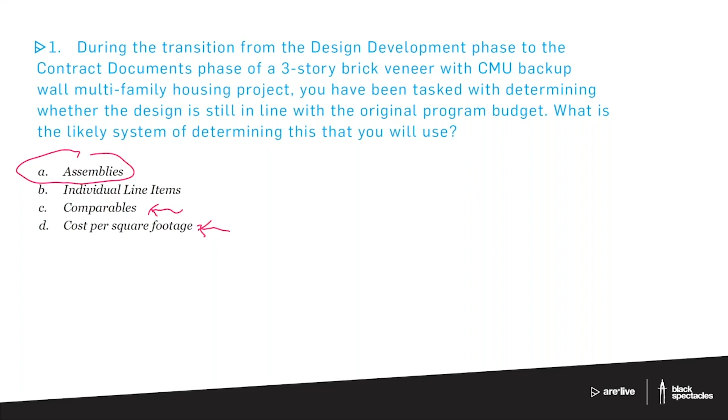I always say this—remember, this is just me writing these out in order to have some things I want to talk to you about, so they're not necessarily foolproof. If I fooled you on something, don't fret about it. It's not meant to be like that—it's great if you get it, but use it as an opportunity for thinking. Don't be mad at Mike. Please don't be mad at me. You can be mad at Mark if you want, but don't be mad at me. Fair enough. All right, number two.

After years of flooding and all the calls from irate taxpayers and voters, your local town has instituted a very robust set of regulations about stormwater issues. Which of the following are probably part of the regulatory structure? Choose three.

This is something actually happening essentially all across the country—there's so much built-up hard surface, roofs, parking lots, roads, that we're collecting this huge amount of water and nobody really knows quite what to do with it. As we get storm surges, we get backups that supercharge our stormwater systems, which in most of the country are combined with the sewage system, for obvious reasons—it's cheaper to do one system than two completely separate systems.

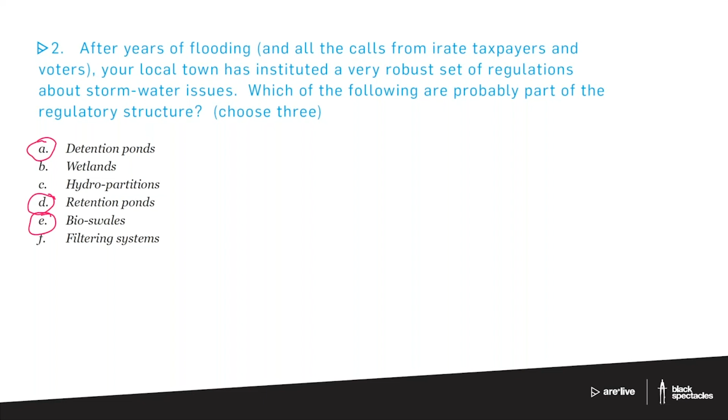All right, I think we're down to about 100 folks actually, so a lot of people got that one right. Cool. All right, number 3.

A 3-story office building you are designing has 9-foot ceiling heights throughout. In trying to formalize the building sections and the egress stair layout, you review with the structural engineer and the MEP engineer and receive the following information.

Structural wide flange beams and girders are 21 inches max. The corrugated steel deck with concrete fill is going to be about 5 inches max. The largest duct is likely to be 40 by 24. And the clear area above the drop ceiling for the light fixtures and sprinkler layout is expected to be about 10 inches.

And the question becomes: how many risers are there between the second and third floor? This is a pretty simple question. It just has a lot of information in it, but it's actually a very simple idea. All you're really trying to figure out is what is the floor to floor.

We know what the floor to ceiling is, but if we're trying to understand the stair pattern, how many risers, how many treads, how big the stair needs to be, we need to know not just the floor to ceiling, but the floor to floor. So by just adding it up, we can get a pretty good idea.

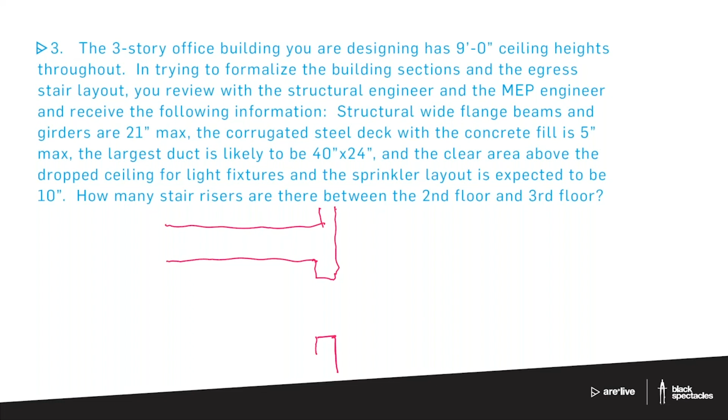So if you can imagine, you've got a floor system, I've got a wall here, there I am standing in the space. I've got decking there. I've got the wide flanges, the structural system underneath that. I've got space for the ductwork.

And then I've got this other space, which if you're not used to it, may sound a little weird, but it's that last little 10 inches that they've left for the light fixtures and the sprinkler layout.

Now, the reason we do that is because this is an office building, an office space. You don't have to do that, you don't even have to have a drop ceiling, there's lots of different ways this can get done. But office space is typically understood to be quite different from residential space.

You might change things in residential, like if somebody moves out of a condo and somebody else moves in, they might change the colors, take a wall out, do this or that, but effectively it's going to be the same basic layout. At least that's the expectation.

Whereas an office space in an office building, people are going to change that pretty regularly. Every 5 years, it's probably likely to have a new layout, as one business moves out, another one moves in, or the business holding it has some change in the way they're organizing things, and instead of lots of small offices, now they're doing one big open office with office corrals in it or something like that.

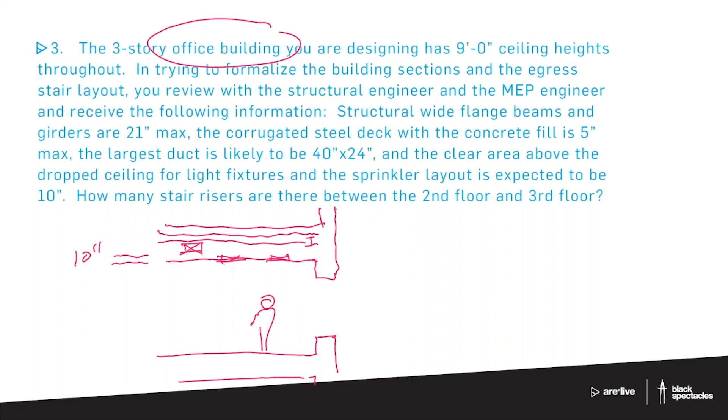The other ones are all pretty straightforward, just adding up numbers. The one little catch is the 40 by 24, because you have two numbers there. There's no reason to assume you'd have to go the tall way unless it said so, so there's no reason ever to do that. You'd always go with the shorter number in this case. So that ends up being 9 feet, which is 108.

And then we've got 21, 5, 24, and 10. I believe that adds up to 168. Somebody want to check me on that? Let's see here. All right, and then we're going to divide 168 by 7.

So why are we dividing 168 by 7? Well, that's because our assumption is that this is a public space, not inside your house or apartment. That means the stair has to have a maximum riser height of 7 inches. So that's where we would always start. We're going to divide that and get 24. So 24 is the correct answer for how many stair risers there will be.

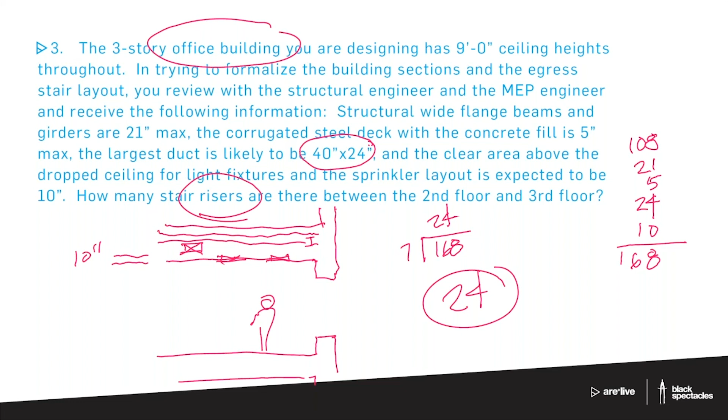Number 4: to finalize the schematic design for a single-story small gymnasium for the junior high school your firm is designing, you make a reasonably accurate best guess for the structural system for the 68-foot clear span. Choose one: Vierendeel truss, wide flanges, concrete slab, or open web steel joists.

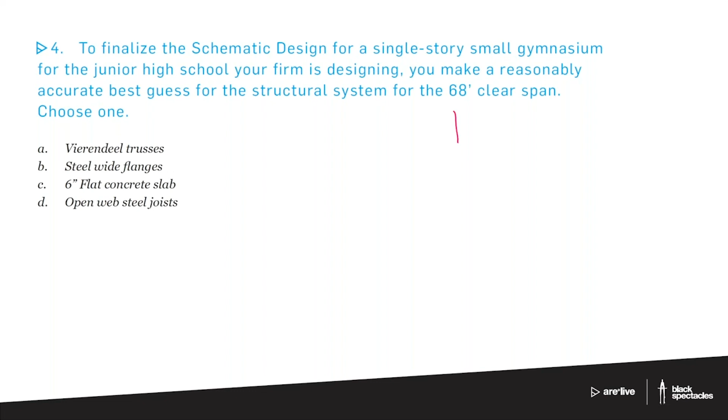So, Vierendeel truss is just so likely to show up on the exam. It's a kind of old school architectural thing, and it's weird because it's a very specific truss that actually isn't a truss. If you think of what a typical truss looks like, with all the diagonals, it's probably not great - let's add one more there. That's a kind of classic truss.

A Vierendeel truss looks like this - which is to say, it's not a truss at all. Without the diagonals, it doesn't actually function as a truss. But architects, especially those from the 60s and 70s, love the Vierendeel truss. It has this very cool, memorable name, and so it shows up all the time on the exam. Often you'll see these used as bridges, where the scale is so big you can kind of walk through it. Architecturally, architects always love them because without the diagonals, the steel doesn't get in the way of the windows, so it fits into a typical architectural scene. But it's a very well recognized name, not always appropriate.

It's very expensive - all of these have to be moment connections for this to work. It's a much more expensive system than you'd use on something like this, unless there was some really big defining reason why you needed it, and it doesn't say. So we're definitely not doing Vierendeel truss, but you should know that term because it's likely to show up at some point.

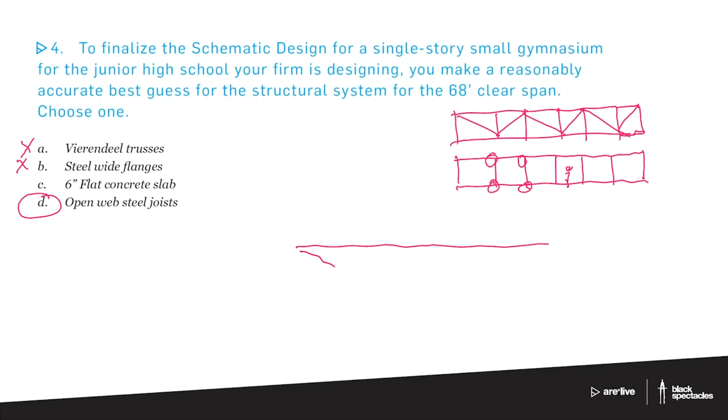You can go shorter as well. The big advantage of open web steel joists is that these are the ones that look kind of like that. The other big advantage, other than being relatively light and comparatively inexpensive for the amount of steel you've got, is that they're open.

So I can put ductwork through them. They don't weigh a lot, so they're not adding heavy load to the building for foundation purposes and everything else. So there's a bunch of advantages. The big disadvantage, like I said, is that they do have a little bit of bounce. So to get the stiffness, they have to be pretty deep, but you're not using a lot of steel. That back and forth makes them a logical choice for a project like this.

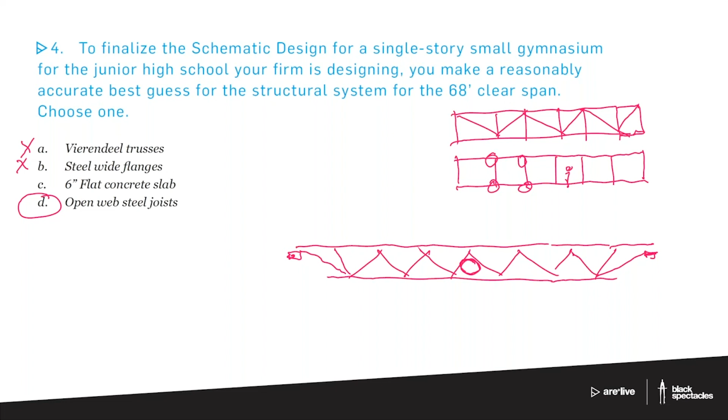All right, I think we're down to 42 people, Mike. All right.

Number 5, the standpipe is located where? Probably: we have fire-rated egress stair aligned with the main vent stack, part of the plumbing waste system, with the scaffolding during concrete formwork stage.

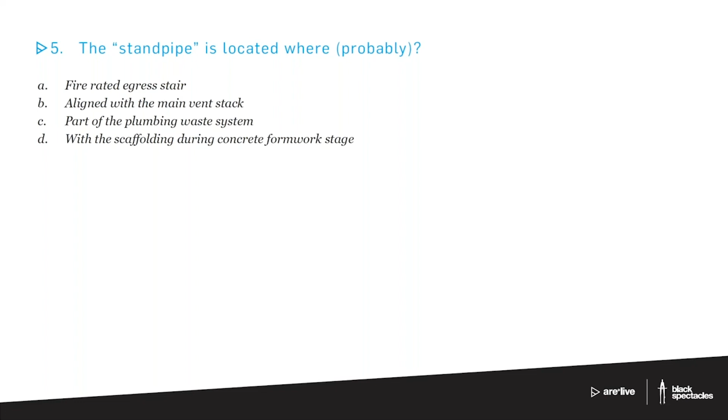So this is one where you just have to recognize the term standpipe. I'm just going to give you the answer: the answer is at the fire-rated stair.

The easiest way to think of it is picture yourself as a firefighter. You run into the building, look at the annunciator panel, and it says the fire is on the 5th floor. You take your hose, connect it to the fire hydrant out on the street, and your hose is now filled with water. You're running up the stairs with the hose filled with water, while people are trying to get out of the building, and you're getting water all over the place and people are slipping. It's a recipe for disaster.

So a way around that is by using a standpipe, essentially a pipe that shows up on the sidewalk and goes straight from the sidewalk into the building, typically right up vertically at the fire-rated egress stair. So that firefighter, instead of taking a full hose up the stairs, goes in, figures out the fire's on the 5th floor, and runs up the stairs or takes the elevator with their hose. Somebody connects the standpipe out at the street to the fire hydrant. The standpipe fills with water as it goes, charging up all the way up the building. By the time the firefighter is on the 5th floor, they can connect to that standpipe with their hose and start putting out the fire.

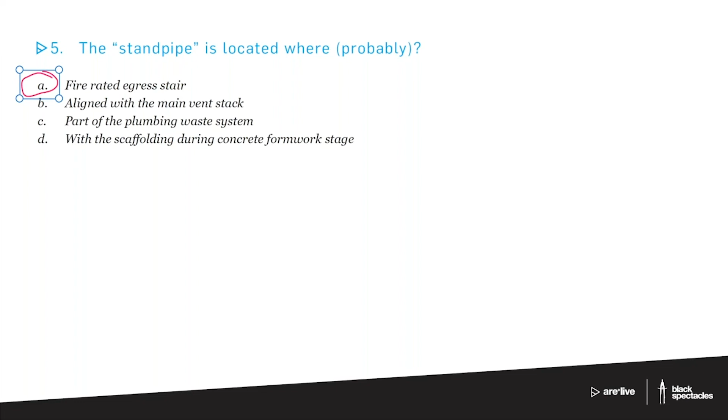Okay, I think we're down to 39. Alright, so I've got a lot of people holding on here. I think we're going to be okay, sending out a lot of T-shirts.

Number 6: during the initial project analysis, it was decided that the Denver University building should focus on long-term sustainability. Which of the following seems likely? We have DX rooftop units, R13 wall assemblies, geothermal ground source heat pumps, and LED uplighting on the front facade of the building.

Let's start with the LED. Obviously, if I'm choosing a lighting system, LEDs are a reasonable choice, so that's potentially a positive. Uplighting on buildings, though, when you're talking about sustainability, is not really a current way of thinking about it. The problem with uplighting is that you're putting a lot of light up into the sky, called night sky lighting, and wasting a lot of the energy that went into making that light. The other thing it does is confuse the birds. So there's all sorts of problems with uplighting on buildings.

So let's go to R13 wall assemblies. R13 is just not a lot of insulating power. A place like Denver, you're going to want serious insulation in those walls. R13 would be a pretty typical old-school amount; back when I was first starting out, we did R13 walls all the time. These days, in a place like Chicago or Denver that gets pretty cold and also pretty hot, it would be very unusual to do anything less than R19. I just did a building at R23, and everybody was kind of sad it didn't go higher. There's been a big sea change over the last 10, 15 years — R13 used to be a relatively respectable amount of insulation, but these days it's just not, especially in a place like Denver.

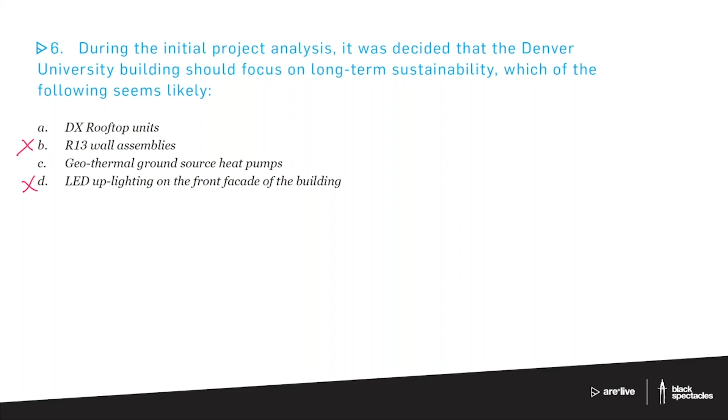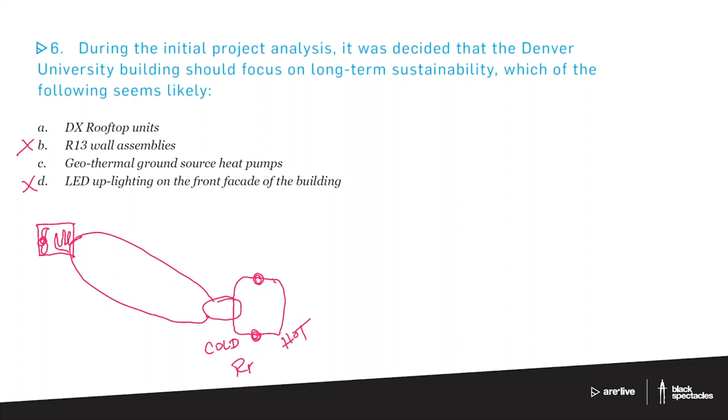So I'm going to say no to D and no to B, which brings us to DX rooftop units and geothermal. The DX rooftop unit is the concept where, for air conditioning, the classic system is the 4-loop system. So I have a refrigerant loop with a compressor and an expansion valve, which makes a hot side and a cold side. On the cold side, I make a bunch of cold water by running the cold refrigerant through a coil. So I have this cold water, and I make a loop of it, bringing pipes around to wherever the air handling units are. Then I have an air handling unit somewhere — maybe 10, maybe one, doesn't matter — the loop just goes to all of them, and that cold water becomes a coil in front of a fan. So I have the refrigerant loop, that's one, and I have the chilled water loop.

And then I have the air loop. Different people will call these slightly different things, but you get the idea, I hope. The air loop is I have that fan, it's going to blow across that coil, and I'm going to get air blowing out into the space. And then eventually it'll become return air that's brought back, and it'll get reconditioned by being blown across that coil again. So that's that air loop. So that's 3 of the 4.

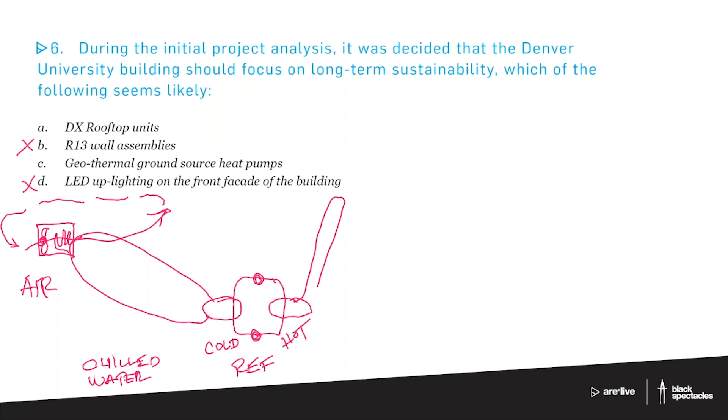And then the 4th one is on the hot side, I've got another barrel of water, and I take that water and I go up, presumably to the roof, but doesn't have to be, could be somewhere else. And I do a cooling tower on the roof, and I let the air take away a lot of that excess heat. So the refrigerant has put heat on one side by pulling it out of the cold water on the other side. So I'm pulling heat out of the cold water and making it colder, and I'm putting it into the hot water on the other side. I'm then getting rid of that excess heat. And that cold water, once I've made that cold water, now I'm sending it around the building, and I have the air side loops to be able to kind of blow around. So this is the heat rejection loop, and that's all 4.

So that's a classic system. A DX rooftop unit is more like what your window box air conditioner is like. If you've ever taken one of those air conditioners you buy at Home Depot or something and put it into your window, that has all of this. It has a refrigerant loop, it has the air loop, it has a heat rejection system, but it doesn't have any of the water. So there's no water involved on that one. And the DX refers to using the refrigerant as the coil for the air side loop.

So it's a direct relationship between the refrigerant and the air loop. It's a great system for simple settings, for straightforward, off-the-shelf pieces. It totally makes sense for certain kinds of units, but it is absolutely not going to be the most sustainable version of what's going on.

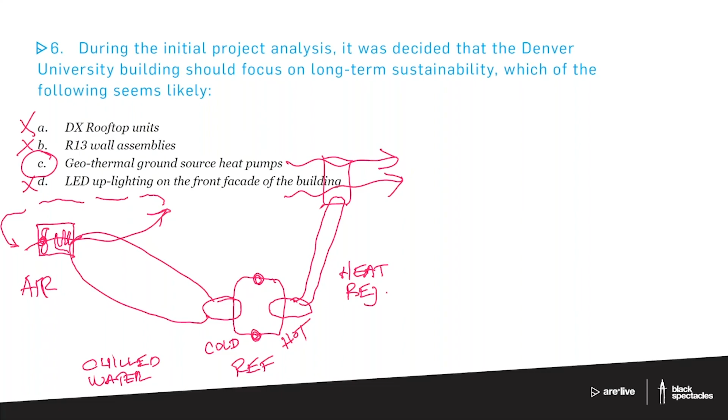We did have one good question here. Mihul asked a question going back to one of the earlier ones: considering bioswales are not connected directly to the storm system, why would the local town regulate it?

That's the question there. It's part of a system that you would have, as well as like tanks of water under your parking lots and cisterns and all those other things that I mentioned. You have to show that at the highest point, different municipalities will use different ways of talking about it, but like a 100-year storm or 200-year storm, things like that, to say okay, this amount of water is expected at a 100-year storm. You're not expected to be able to handle a 500-year storm, but at a 100-year storm, you should be able to say where all that water is going to go. And so a bioswale would be one example of where you could say, well, 4,000 gallons will go to the bioswale.

110,000 gallons will be taken in the cisterns and in the storage underneath the parking lot. You would have to add it all up and show that you can meet that requirement as the rain comes through on an expected level. It's not going to be the worst possible rain that you'd have to show you can maintain, but it would be a very bad rain that you'd have to show you're not letting excess water off of your site and flooding other people or the storm system.